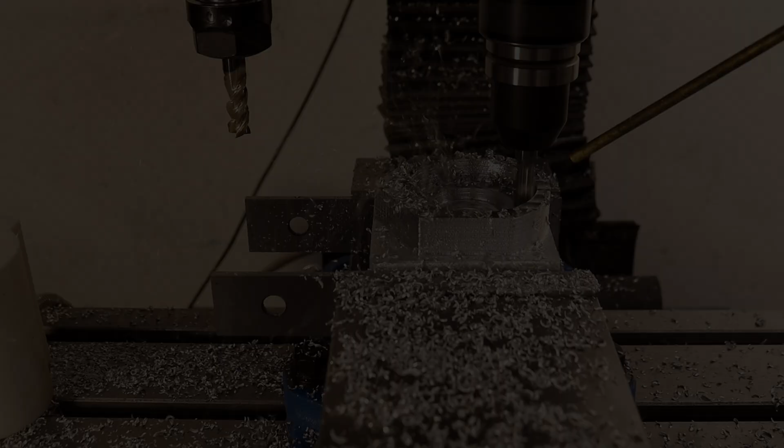A CNC mill in a home shop is often a set of compromises optimized to a price point. We only have so much money to spend. We're only going to get one machine, but we want to process a variety of materials: wood, plastic, aluminum, steel, stainless steel. That means we're going to be limited by something when we process any of those materials, most commonly spindle speed, spindle torque, or feed rates.

I've wanted to experiment with a secondary spindle, that is, mount a second spindle on the side of the mill's head. What's really great about that is you get to reuse all the motion control hardware and software that you have on the CNC mill. A lot of people use trim routers, but I really feel like the trim router would have a short life if you're running it for hours on end.

I had this spindle, a 2.2 kilowatt, 24,000 RPM spindle. The main spindle is 5,500 maximum speed, 750 watts. And you say, well, that's a huge difference in power. But remember, as you go to higher speeds, more of that power is used just to maintain the speed, so it's not quite as big of a difference as it seems.

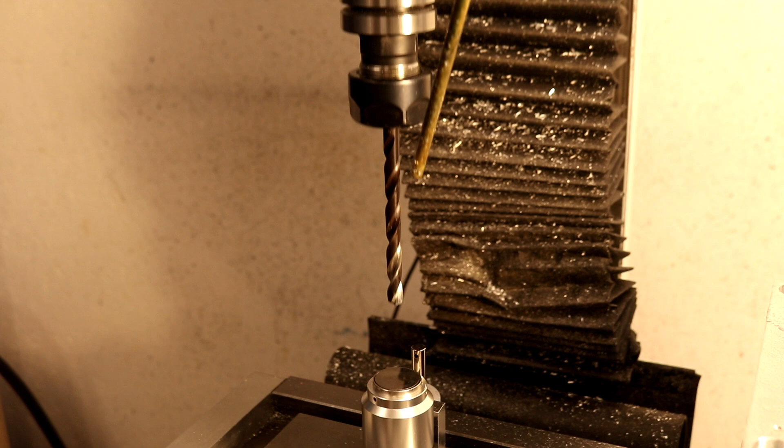I used two plates to mount the high-speed spindle, and the idea is that the lower plate against the head could be a flat reference surface for another tool. Think of the high-speed spindle as just a generic tool that gets mounted onto that plate. I don't have other tools in mind right now, but I have mounted other things onto the side of the mill's head before, cameras and sensors. So there's some history of using the side of the mill for mounting other devices.

I spent time flattening the two large faces of these plates so that there'll be a lot of surface contact between them. I used sandpaper and a surface plate to do that.

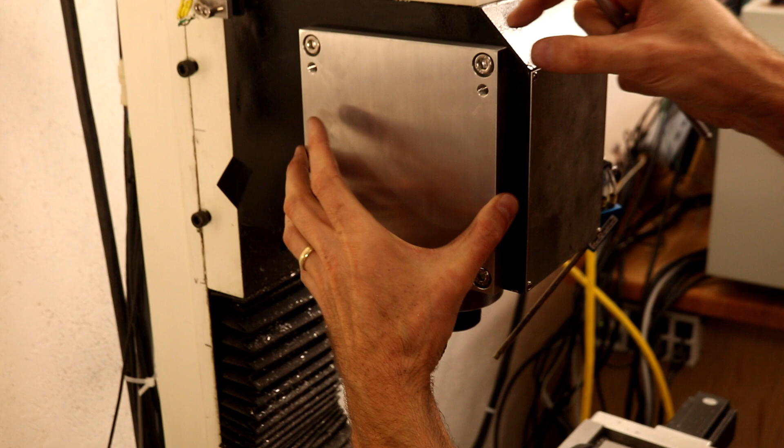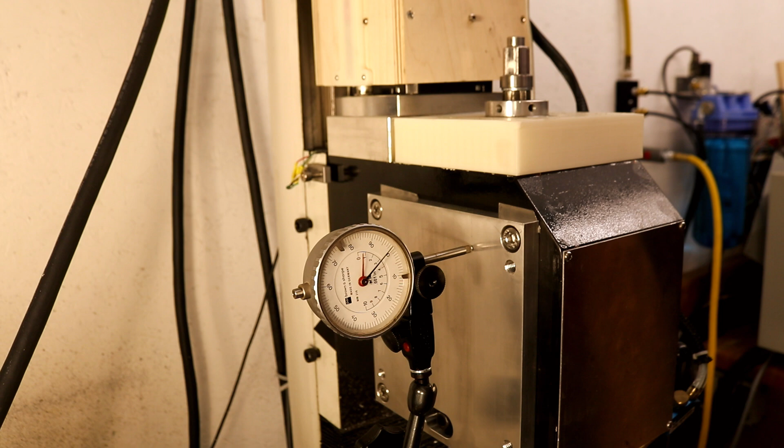Before this video, the main spindle has already been trammed, but the mill's head is a casting and it's not very flat or square with respect to the spindle. So to get this plate aligned with the spindle in one dimension, I'm inserting shims, and then it'll be square to the table. The main spindle's been trammed, so it's square to the table in two dimensions, and now I'm aligning this plate so that it's square to the table in one dimension.

Because we're aligning two rotary devices, there's no need to align this plate or square this plate in the Y direction.

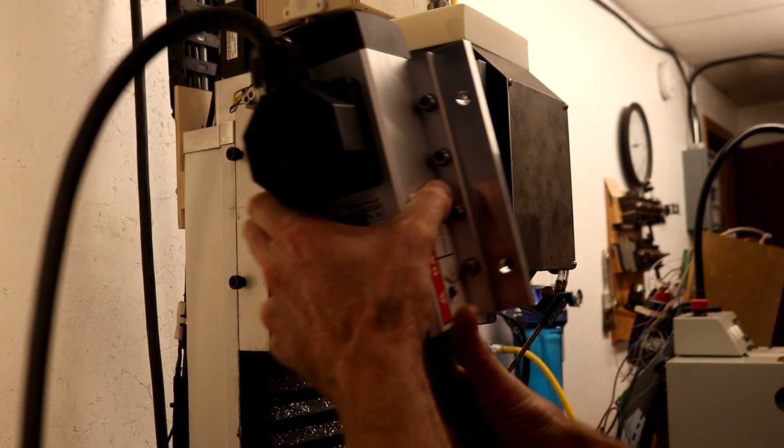The power cable I'm using for the high-speed spindle is a VFD cable from Automation Direct, and has a high voltage rating, so it has thick insulation. It's a fat cable, but it's also shielded, and it should cut down the noise from the VFD.

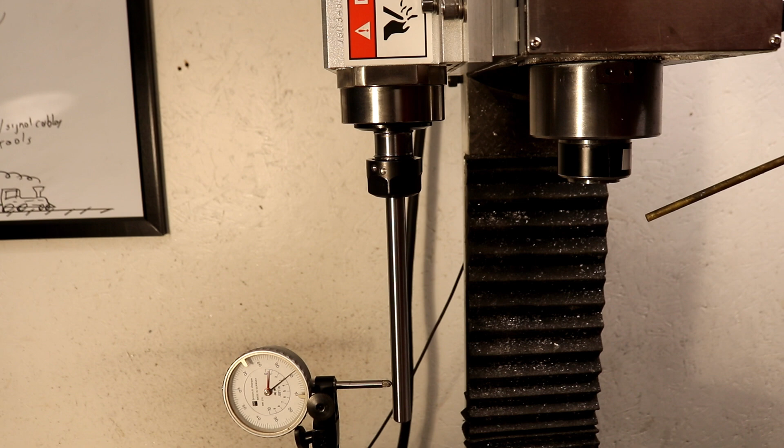I'm using almost a 12-inch rod for tramming the high-speed spindle. It's pretty true in the X direction already, and only a little bit of adjustment was necessary in the Y direction. So spending time to get that lower plate squared was time well spent.

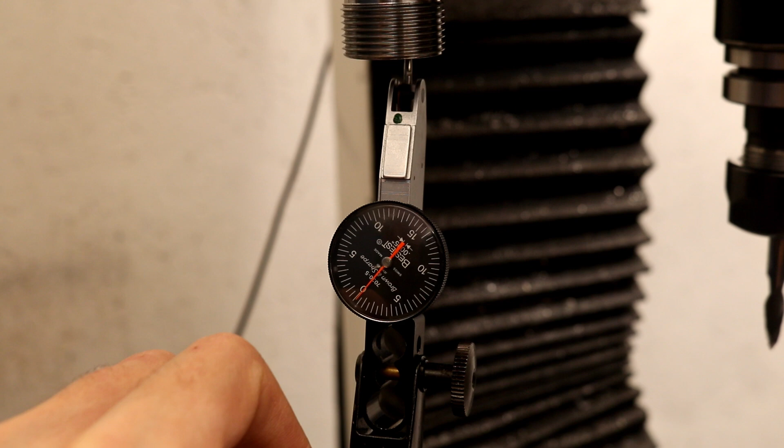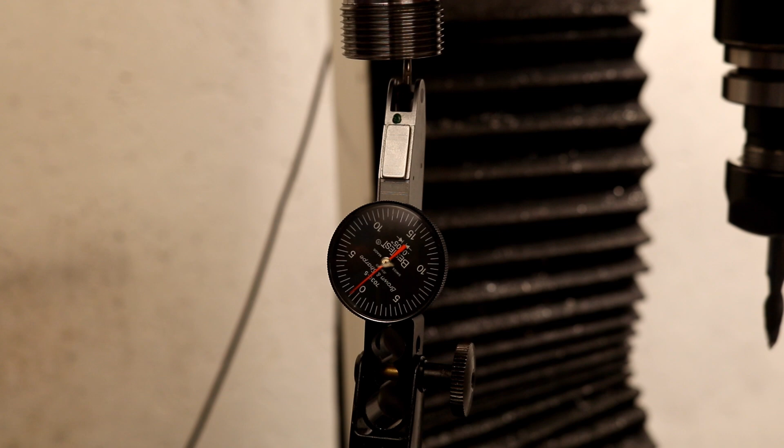This is an ER20 spindle, and I'm measuring the runout on the collet mating surface. There's practically no measurable runout on this surface. I'm limited much more by the flex of the mill than by any runout on the spindle. Granted, I'm measuring the flex of the head at its extreme vertical position, so it's going to be exaggerated there.

Tool runout was less encouraging, with about 1,000ths total runout. The short answer why I saw the 1,000ths runout on the tool is I hadn't torqued the ER20 nut sufficiently, and the quality of the collet itself.

That collet came from this set, a set of 30 from Tormach, and this set costs about $200. This single collet came from Lyndex, and I bought it from McMaster, so there's a McMaster premium to be sure. It's about $41, about six times the cost of the Lyndex collet versus a single collet out of that set of 30.

To torque it, I use a torque wrench with a head that can be replaced for an ER16, ER20, or ER32 collet, and I got that originally for torquing TTS tool holders. Now, what I started with for the TTS holders were these aluminum wrenches, and they are aluminum because you can tell they will round out if you try to tighten things too much. But they work well, I still use these a lot. They're just hard to hold and torque consistently.

So then I got this holder for TTS tools. You slide the TTS tool holder in here. It's a one-way roller bearing, and one way you can tighten the nut, the other way you can loosen the nut.

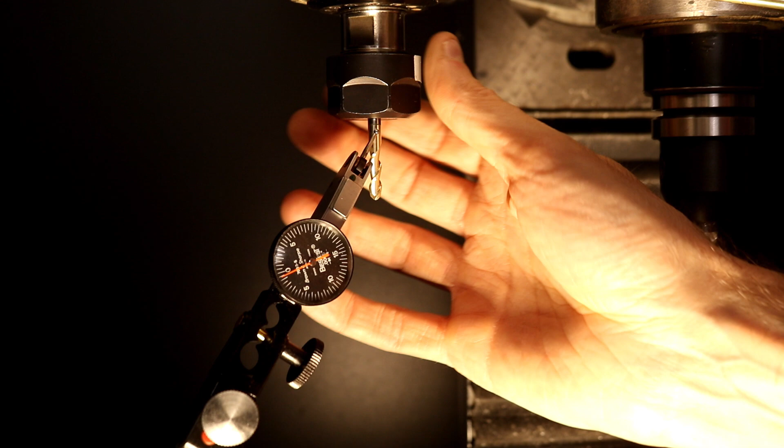I want to be able to use the two spindles cooperatively, so within the same program, switch between them, taking advantage of each of their better features. To do that, I need to know the offset between the center points of each spindle. I'm using a Drewtronics touch probe to measure the machine coordinates of a reference point, and when this is done in each spindle, the difference between those coordinates will be the offset necessary to move between each spindle.

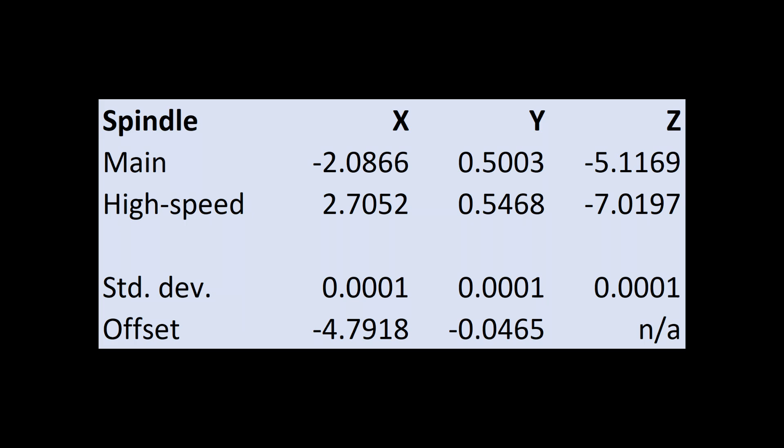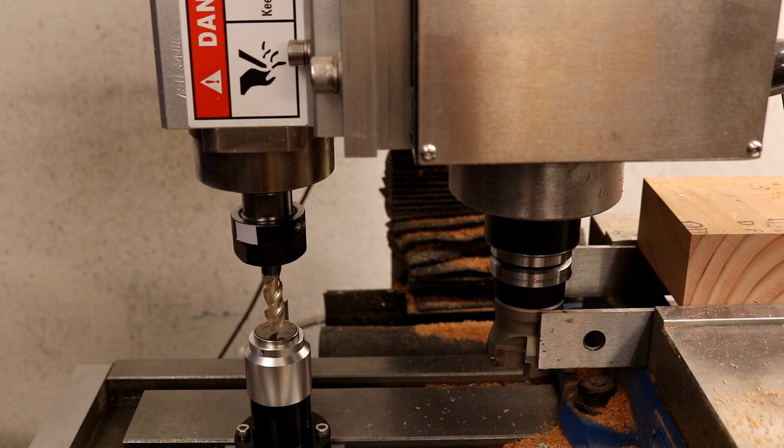The X and Y offset can be preloaded in a G92 offset, and that makes it really easy to update these values but keep the program the same. Even within the cam setup, it's not necessary to explicitly select one of the spindles. Tool length is always measured relative to the nose of the main spindle, regardless of whether the tool is mounted in the high-speed spindle or in the main spindle. This is hugely simplified by using the tool length probe.

The spindle speed is controlled by an analog input from a Mesa 7i76E card into a VFD. Out of the box, the commanded to actual velocity agreement was pretty good, except on the low side. I tried a couple of different ways to improve that using a PID control loop, which is what I'm demonstrating here. It's really neat about LinuxCNC that you can update the values of the PID control loop and see the effect on an oscilloscope-like interface.

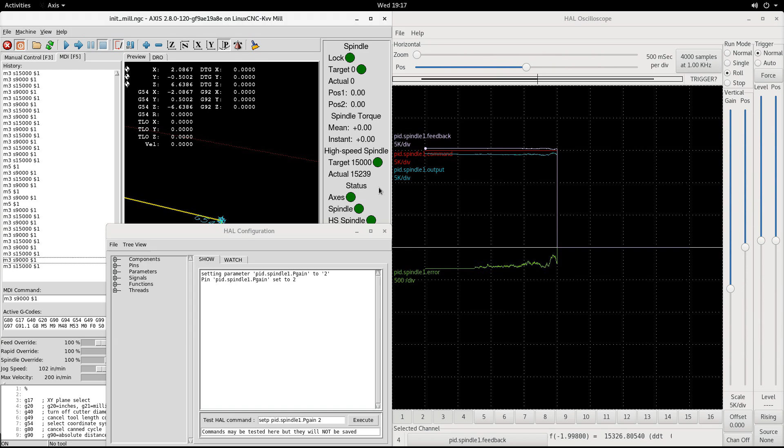In the end, I used a simpler piecewise linear function using the lincurve HAL component. Again, you can tinker with the values in LinuxCNC and verify them without having to restart LinuxCNC, and that's really nice. I also wrote a Python module to retrieve the parameters from the VFD, to create a backup of them, to set parameters, and to read status conditions. That's how I get torque and voltage measurements from the VFD.

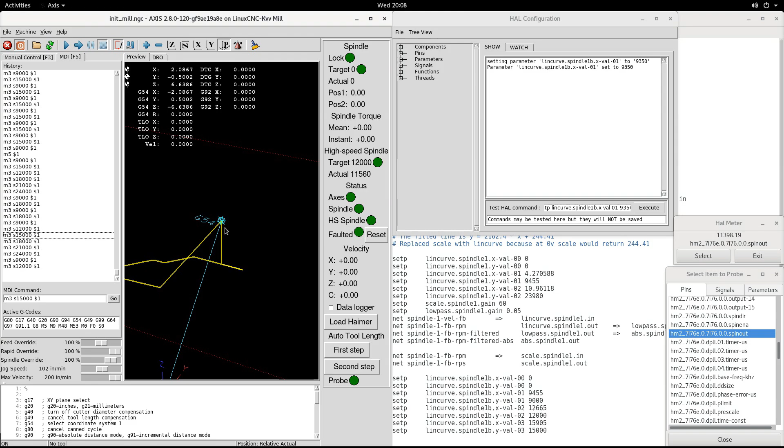I would probably use a Python module for speed control if redoing this work. There's a dedicated fault line from the VFD into the Mesa board, so it should be pretty safe even if there is a fault in the USB to RS-485 converter.

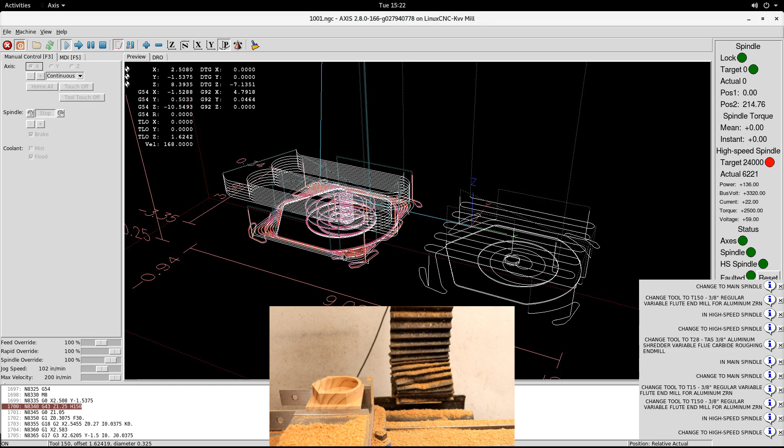To test the cooperation between the two spindles, I started by cutting parts in wood, and it's really neat to see the division of work between the two spindles in the projection of the G-code in LinuxCNC. Tool 150 is a tool mounted in the high-speed spindle, and on the right-hand side of the screen I'm showing the status from each spindle, including speed and torque measurements.

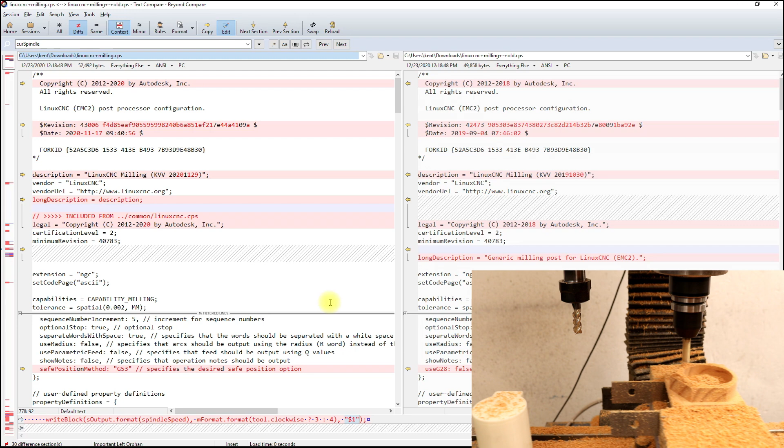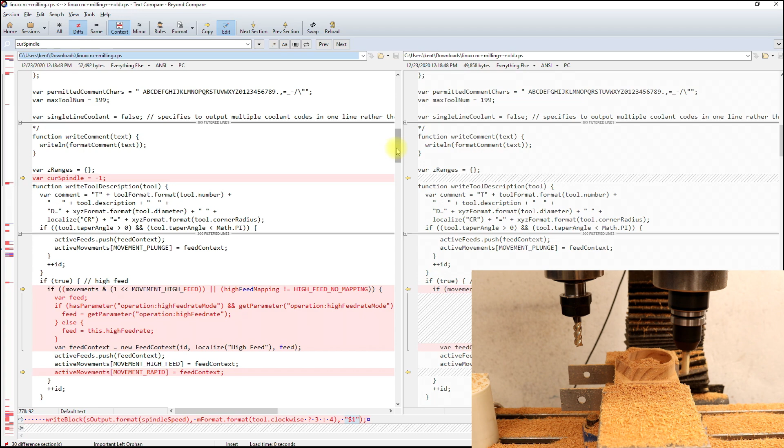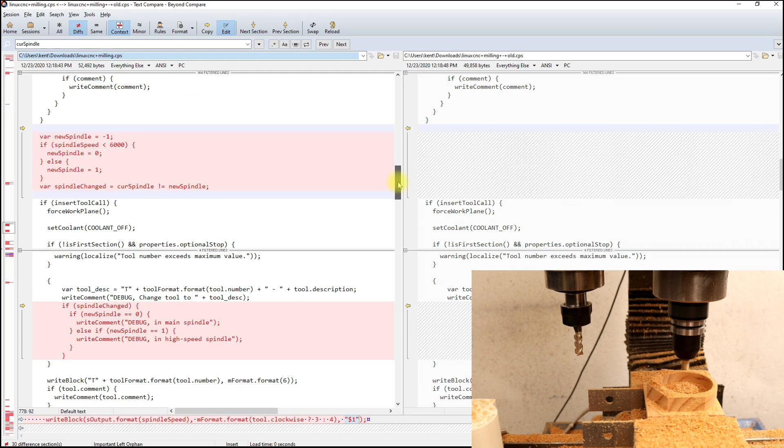To automatically switch between the two spindles, I modified the LinuxCNC post-processor that's used by Fusion360. The left-hand side of the screen contains both my changes and updates from Autodesk, but I'll point out the changes that I made. I keep track of the currently running spindle and calculate the new spindle based on the requested spindle speed. The main spindle can't operate faster than about 5,500 to 6,000 RPM, and the high-speed spindle can't operate slower than 9,000.

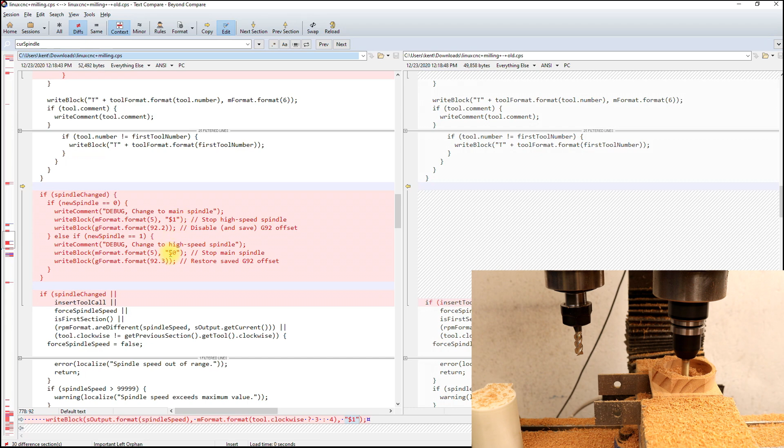If the calculated spindle is different from the current spindle, then I know a spindle change is taking place. I warn the operator that a spindle change is occurring. LinuxCNC 2.8 and above add dollar-sign arguments to the M3, M4, M5 commands, and they route the command to the appropriate spindle. So if the new spindle is the main spindle, I write a message to the LinuxCNC screen saying that a change to the main spindle is in progress.

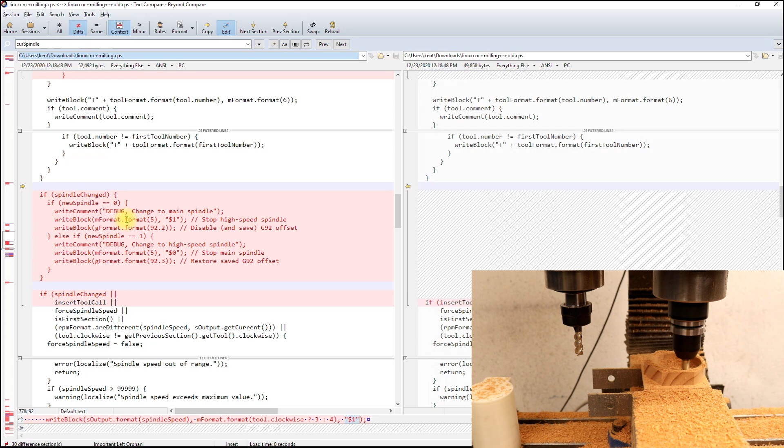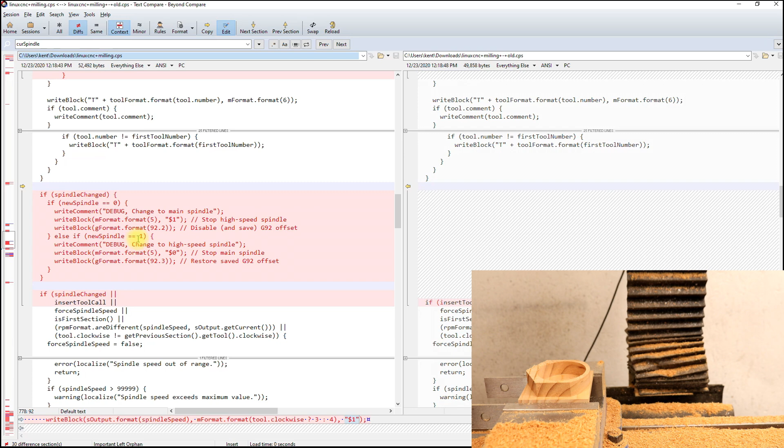I disable or stop the high-speed spindle, so that's the second spindle, or $1, so M5 $1, and disable and save the G92 offset. If the new spindle is the high-speed spindle, I stop the main spindle, so M5 $0, and restore the G92 offset, so G92.3.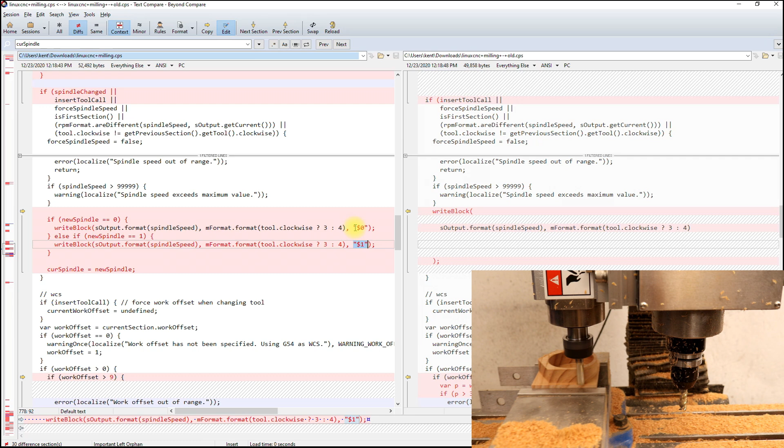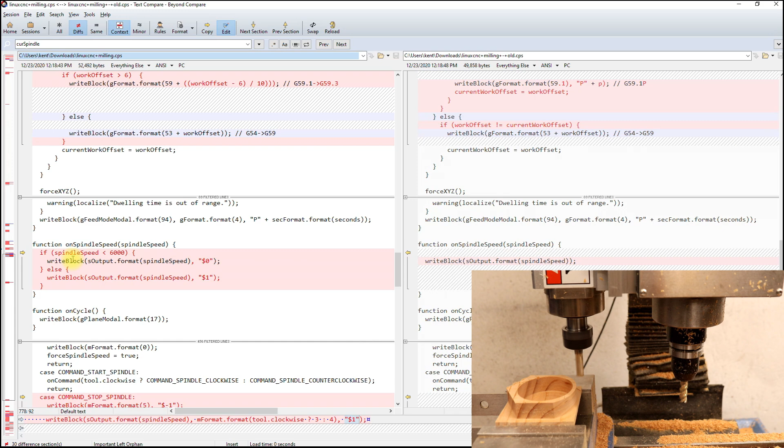Then when the spindle is started, I need to send the appropriate M3 or M4 command depending upon direction of rotation, and then the $0 or $1. If the speed is changed, so if you're using the same tool and the speed's changed, then a little bit of code update is needed to handle that.

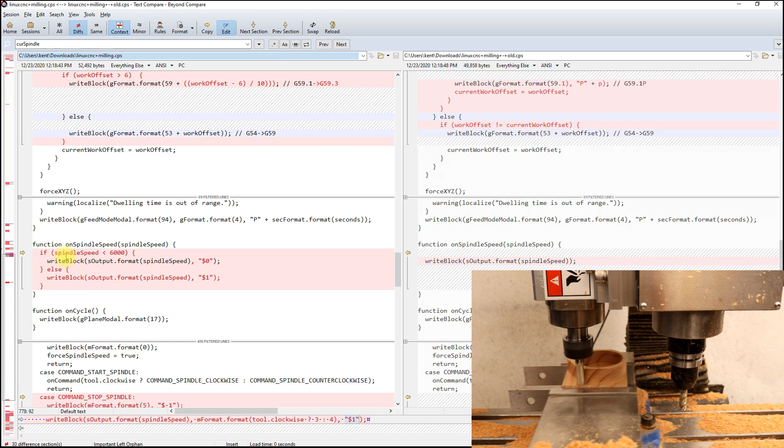This probably has a mistake in it, right? Let's say operating on the main spindle and the tool doesn't change, but the requested speed increases beyond 6,000 RPM. This is going to activate the high-speed spindle. So this might have a flaw in it, that it also needs to check which spindle is currently running.

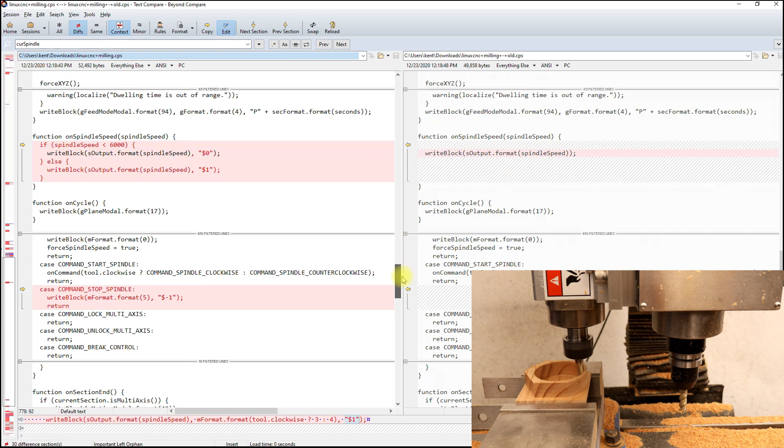And then finally, to handle the stop spindle command, I stop all spindles. Now the same part will be machined in aluminum, and with the exception of the main roughing operation, which is only done by the main spindle, all operations are performed by both spindles to help compare them.

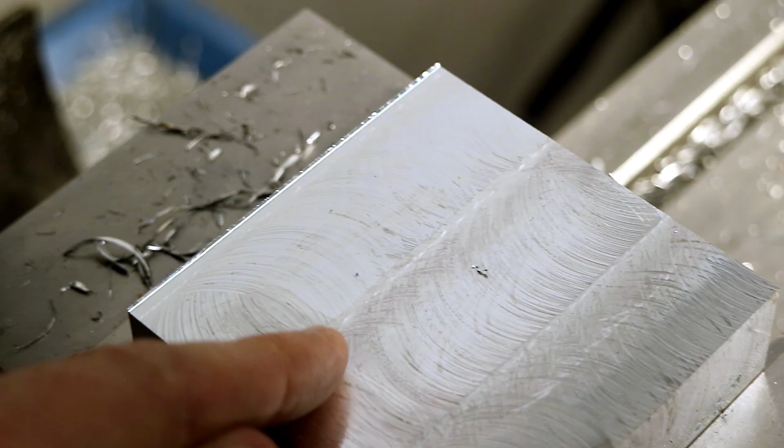Don't really feel any ridges in the wrong direction, but pretty rough in the X direction. 3/8 inch 3-flute end mill, 24,000 RPM, 170 inches a minute, 2,400 surface feet per minute.

On one pass, like this very first one, it looks great, and then coming back the other direction, it looks poor. So it looks great here, in the first pass, and then poor, great, poor, great - it alternates.

Yeah, it's great, it's really smooth. I think there's a lot of potential there. Just need to improve the settings.

This is the main roughing operation using a 3/8 inch roughing end mill. It's a highly serrated, really wicked looking end mill, 5,000 RPM. The only reason I only ran this operation on the main spindle is I only have one of these end mills. Unfortunately, when I made this video, I also only had one 3/8 inch finishing end mill, which is mounted in the main spindle in a tool holder.

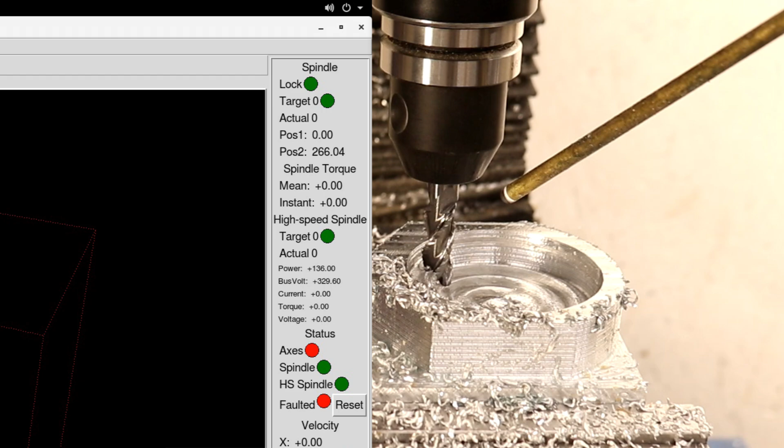If you watch the status indicators in LinuxCNC, right before the crash, the torque spikes up, and the spindle indicates a fault, and then the axes fault, and then finally LinuxCNC faults. I have separate fault indicators for the axes as a group, the main spindle and the high-speed spindle, and they OR together into a single fault indicator in LinuxCNC that shuts the machine down.

Unfortunately, I hadn't propagated all of the second spindle updates through the code. Replaying the operations up to the fault at 200% override, and then drop back the feed rate to 70%.

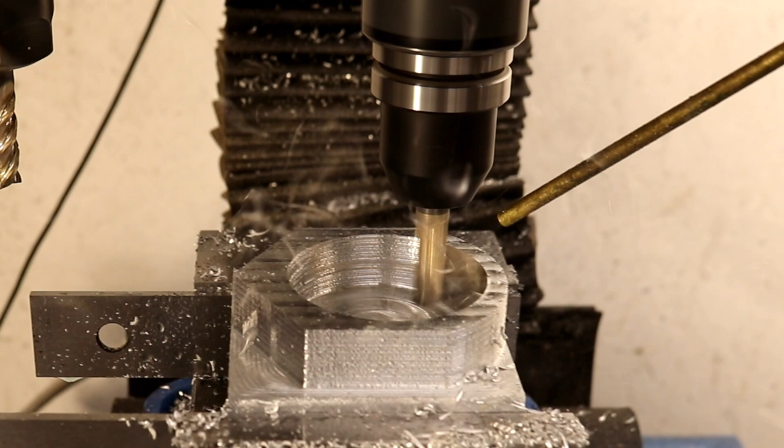This is a 3/8 inch end mill, and only had one of these, otherwise there would be another in the high-speed spindle. The end mill in the high-speed spindle is similar in appearance, except it has notches along the flutes, maybe 3 or 4 notches per flute.

It's a finishing roughing end mill. It's supposed to leave a smooth finish, but instead it leaves ridges at each of those notches. So I don't use those end mills anymore.

The floor isn't too bad, but the walls have this texture on them. And I always see that texture on this mill. Some speeds are worse than others. It's not great. Doesn't take very much to sand it off, but it'd be nice to not have to do that step.

Essentially, each spindle is performing the same finishing operations. The roughing operation left 40 thousandths of an inch axially and radially, and each finishing operation performed by each spindle is taking off 20 thousandths of an inch of that leftover material.

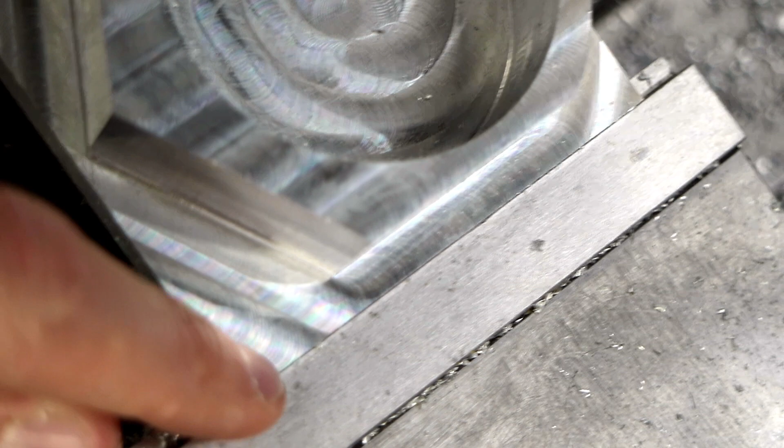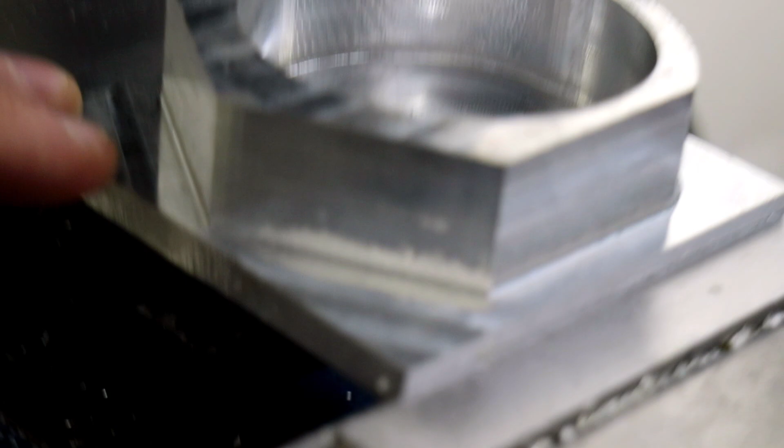The walls look really good as well. You can see a good reflection, and I don't feel any roughness moving this way. There are ridges moving this way, 2 or 3 ridges, and that's because this is a finishing roughing end mill. It has chip breakers, and just end up leaving these ridges, so I don't use them anymore.

Inside, this is where it was running faster. It was 168 inches a minute, but it's 2,300 surface feet a minute, so beyond the 2,000 recommended.

I slowed down the feed to 70%, and you can see we went from this kind of rough pattern, which isn't really that bad to feel, to this, right? I mean, you can see the difference there.

It's definitely distorted there. I'm repeating a couple of the high-speed spindle operations using a slower feed rate to see if doing so will improve the surface finish.

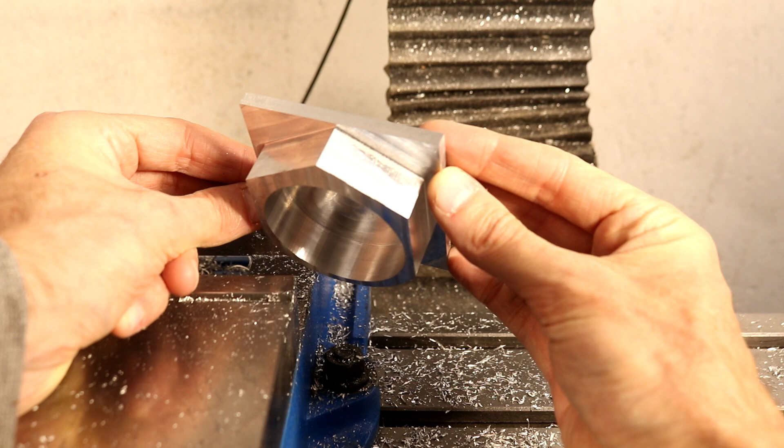It's just going to take some experimenting to get the speeds and feeds right. You can do a really great job. Now, this is only the first part of cut with this spindle. Aluminum, really amazing.